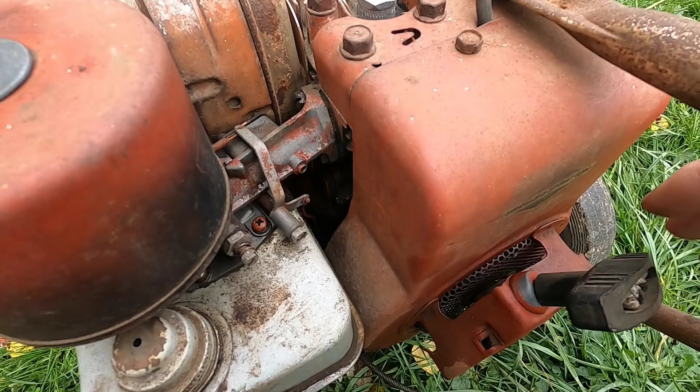This was a purchase I made off Facebook. Normally you see these things for free. Now with the fall season there isn't anyone giving them away. The ad read that it runs like a beast. When I went to pick it up, it wouldn't start. The owner got it started by spraying some carburetor cleaner in here, and she started right up. The blower was working really strong.

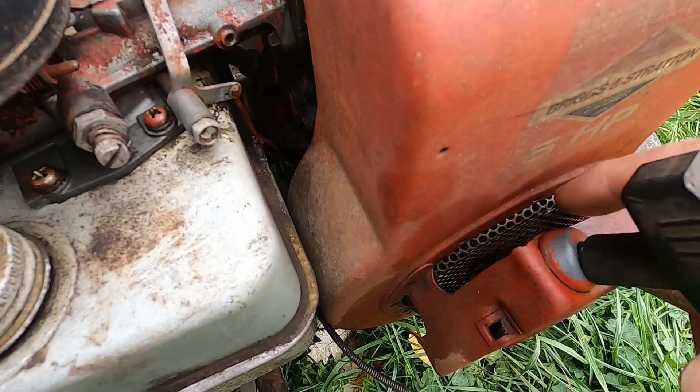There was a lot of force coming out of the blower end of it, but for 2 days I tried starting this, and the best I got was just now what you saw in the video, that it sputtered. First time I did that in days. If you noticed, when it did run, you had a screeching in here. So besides working on this carburetor, I'm going to have to take this cowling off to see what's wrong with the starter. It might be something loose in there. It might be that it threw a couple of bearings.

I'm not sure. So to get started, I'm going to put this up on the trailer to make it easy to work on. And I'm going to be removing this carburetor. And hopefully this tank isn't full of rust. Problem with these old tanks, they rusted up pretty bad. And that could be causing a problem with this no start, hard start situation. So let's get started.

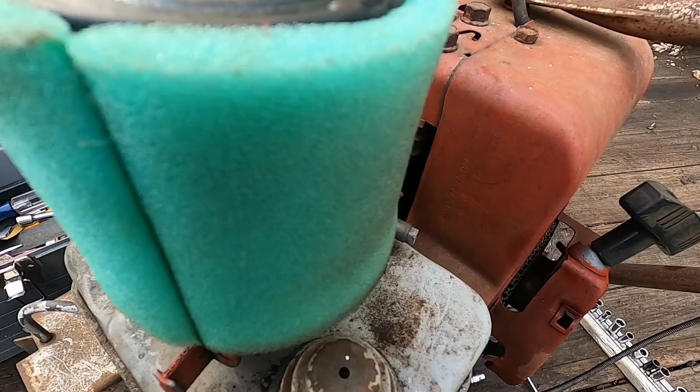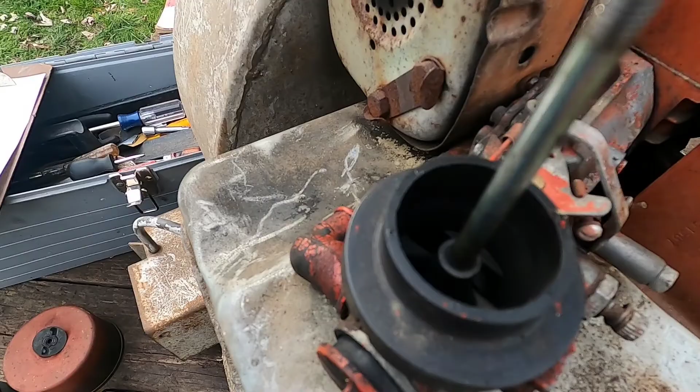All right, looking this over, this is what we have. You have to remove this air cleaner. Got a new air cleaner on it. Looks like a fairly new plug also. Once you have this air cleaner off, you get this carburetor off. I was looking it over. There's a couple of ways we can go. I want to take this tank off because I want to see what the inside of this tank looks like. It's about a half a tank of gas in there.

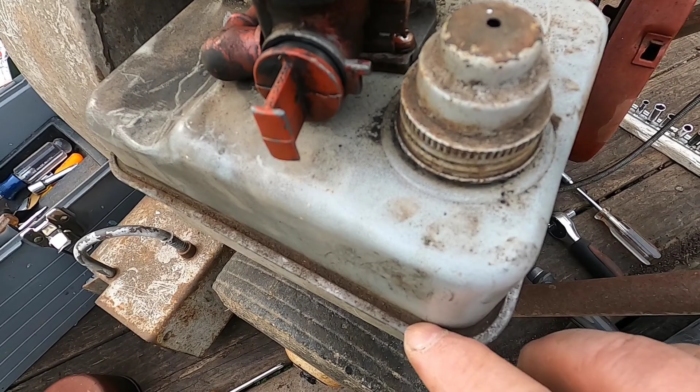And from what I can see, the camera couldn't pick any of that up. I have to get a light in there. You really can't see anything. It looks like it's okay, and it's not pitted on the outside. So I believe this tank will be okay. I don't believe I have to clean out this tank.

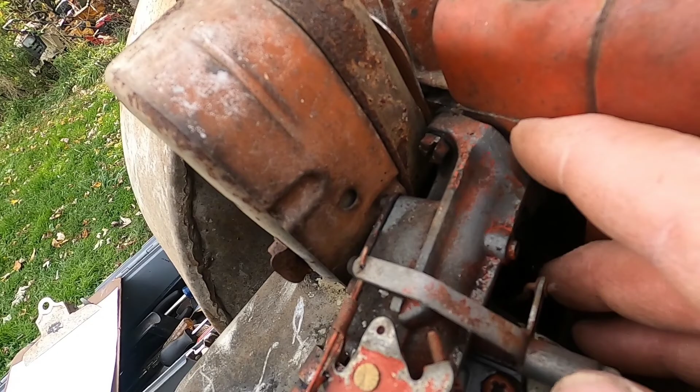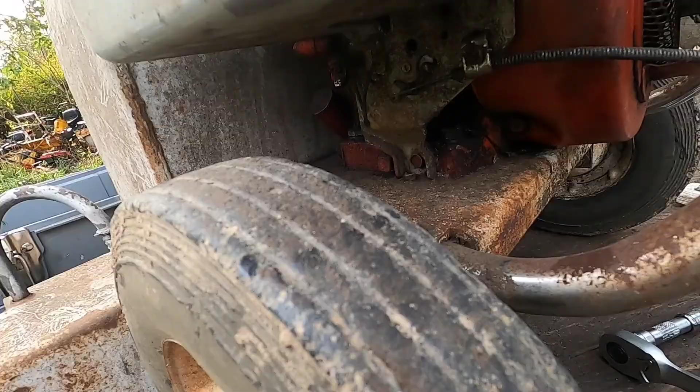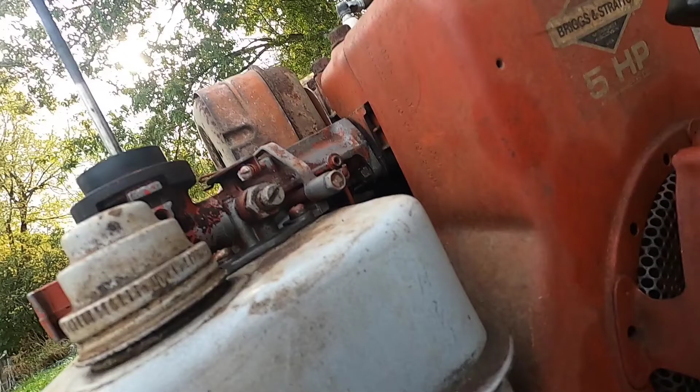First of all, the way this is set up, you have these 2 screws that hold the carburetor intake to the engine. Then you have 1, 2, 3 screws holding the carburetor onto the tank. Now the last one of these I did, I believe it had 4 screws, but it was a little different setup. And to get this tank off, it looks like there's only 1 bolt holding it on. I don't see anything in between here holding it. So what's holding this tank on is the carburetor itself and that 1 bolt.

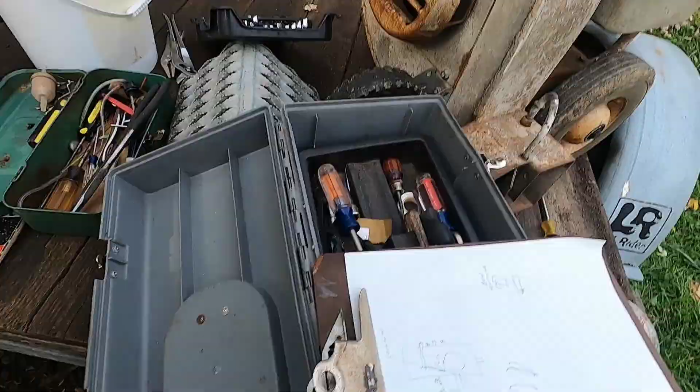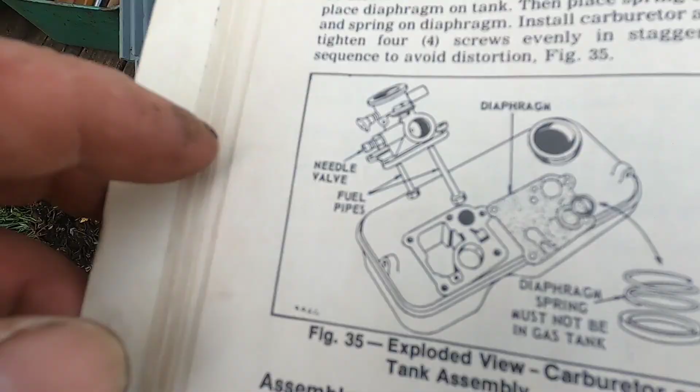So what I'll do, I just might drain this tank, might just siphon it out to see what that gas looks like. And see, the problem with taking the carburetor off like this is there's a long pickup tube on the inside of this carburetor. Let me see here. This is from a Briggs Stratton manual. The pickup tube goes all the way down into the tank, almost to the bottom. My concern is that when I go to wiggle this off, I don't want to snap that tube.

This unit has to be every bit of 20 years old, but I will try taking the carburetor off, leaving the tank on. Now to get this carburetor off, like I said, there's those 3 screws. Plus I'm going to have to remove this screw here. You see this screw, when you move the throttle, it controls the throttle, and I believe the governor down on this end. So I'll have to take this screw out, and let's see, I have to disassemble this piece over here.

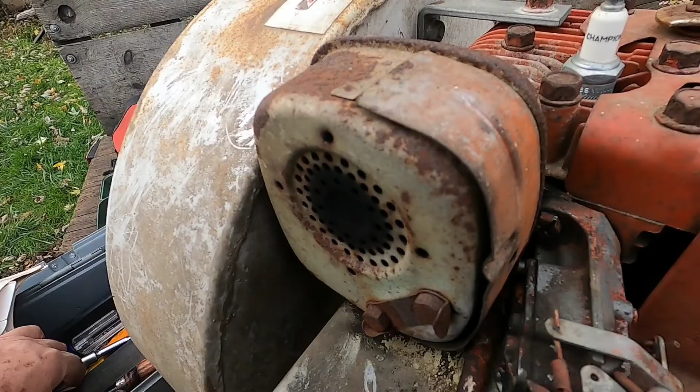I'll be able to remove this tube when I remove that screw. Now here's the kicker. These screws back here, there isn't any way I know of to get these screws out, unless maybe I take this muffler off and I can use a wrench on this. And the only way to get a wrench on here, a thin one, is to remove this muffler. I'm not doing a restoration on here, otherwise I would remove the muffler.

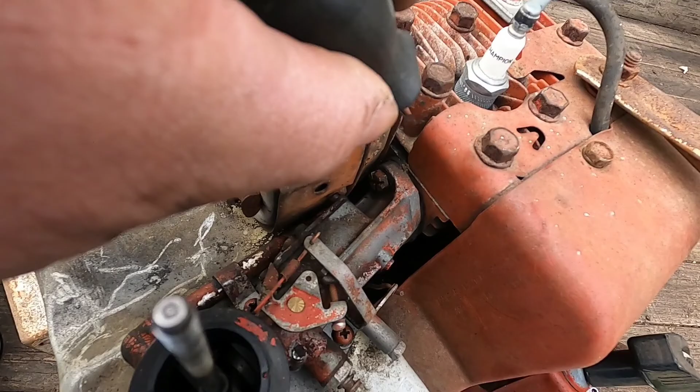But you never know when these bolts are going to stick and maybe even break off into the block, and that's another can of worms I don't want to get into right now. And what I did to loosen them up was to go into the side slots that the screw has, and it turns fairly easy. You can see the angle that I'm at.

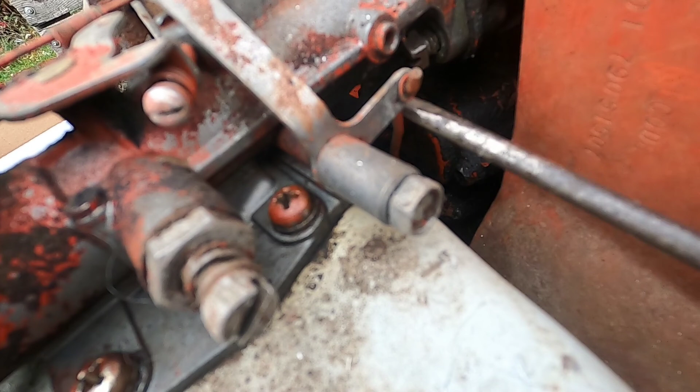Anyway, I'm going to disassemble this carburetor from the engine, from the gas tank, and I'll show you what it looks like and what has to be done. To get these two top screws out, this one I could get a wrench on and turn part way and flip the wrench. This one down here, I found it easier to use a long screwdriver to get into the slots that are on the side of the screw and turning it that way.

Hey, this is taking more time than I wanted it to. I'm thinking it might have been better just leaving it and hitting it with some carburetor spray. And I had to start it. Well, I started it. I gotta finish it. Oh, there we go. I think I got it now.

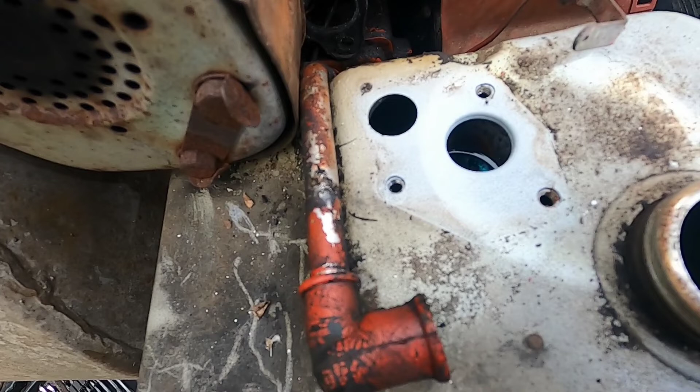Okay. I'm gonna get this screw out, this screw out. Like I mentioned before, I'm going to remove these screws, remove this piece here. You got to be careful not to bend any of the linkages when I get this out. Once I have this off, we'll take a look at this carburetor. I got the carburetor out, and I'm trying to get a view of the inside of this tank, and the camera's just not picking it up.

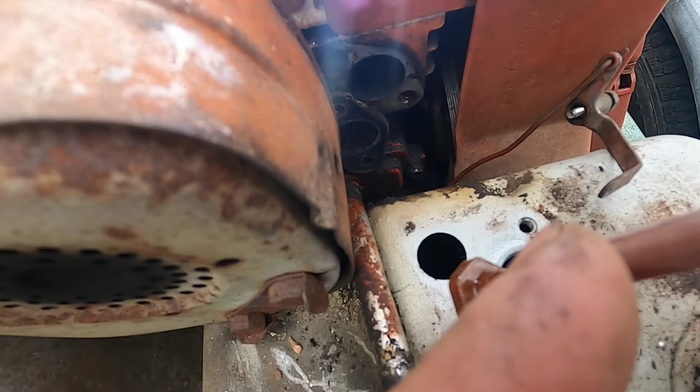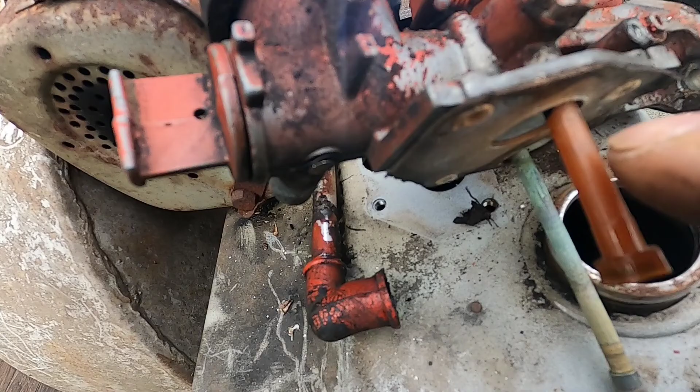For those of you that aren't familiar with this type of setup, this doesn't have a float bowl in it. The way it works, the carburetor pulls fuel up through this tube and it goes into this little well over here, and from this well it gets pulled up through this smaller tube over here, and inside over here there's ports that allow the gas, the overflow gas, to go right back into the tank. So the way this works is that the gas is constantly pumping through.

This over here does look like it has some kind of debris in it. Yep, it's stuck to the bottom. This is what's in that tank. Looks like I'm gonna have to pull this tank off and clean it out anyway. But for now, I'm concentrating on the carburetor. We have these tubes, and you gotta be careful not to snap this tube.

And another thing, sometimes these tubes, they'll have a crack in them. If there's a crack in this tube, it's going to be sucking air in and it's not going to run right. So you got to be careful, and if I'm not mistaken, I don't believe they sell these any longer. It does look like the same size as a brake line though. But anyway, the gasket on this looks okay. Here's where the fuel pump is. I'm going to clean the outside of this off, then I'm going to open this up and see what this pump looks like. I'm going to spray in all these ports.

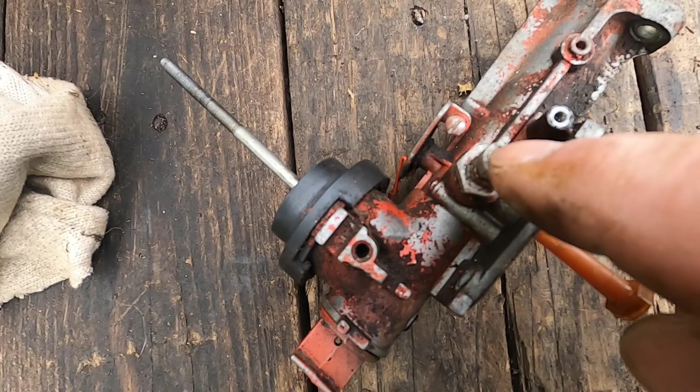I believe this would be the high-speed screw. It's hard to explain and do this while I'm videoing it. But I'm going to turn the screw in, count how many times it was turned in. This way, when I go to put it back, that's where I'm going to start at. I knew it ran with it in this position. Once I have this cleaned up, I'll be back to show you as I'm taking it apart.

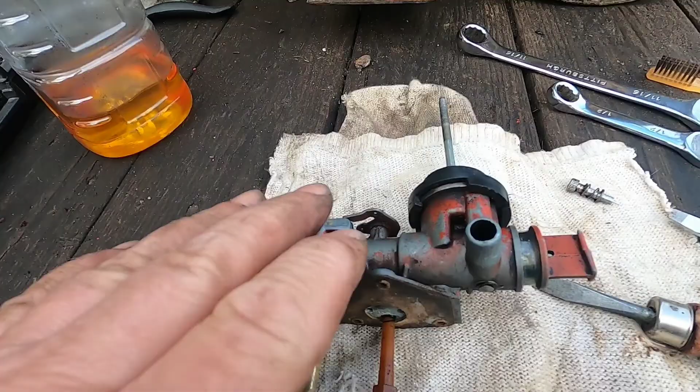I cleaned the outside of the carburetor with a toothbrush and some old gas. This is gas that I pulled out of a tractor, but the complaint was my tractor won't start. Take a look as to why. Anyway, I used this gas to clean the outside of this carburetor.

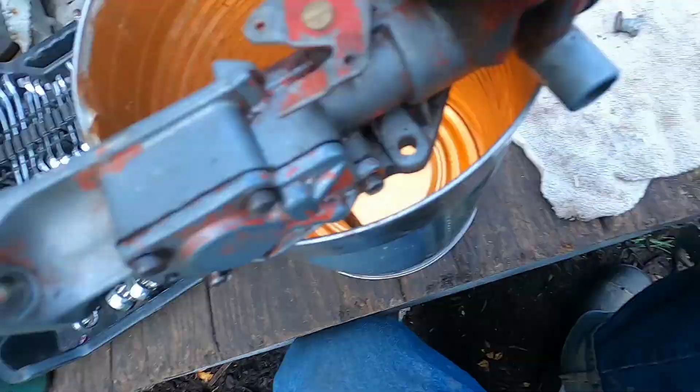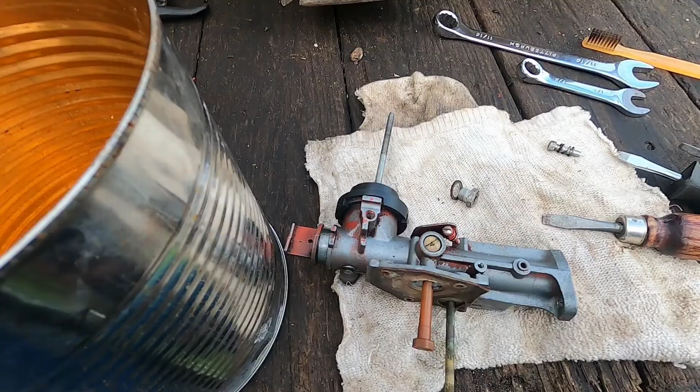I want to point out, on the top of this carburetor, this connects it to the throttle, to the choke, and if the camera's picking it up, there's a tiny spring. Watch, you want to make sure you don't stretch that spring out. Put this in here, we don't want to lose anything. So the first thing I'm going to do is this adjusting screw. I already pulled it out.

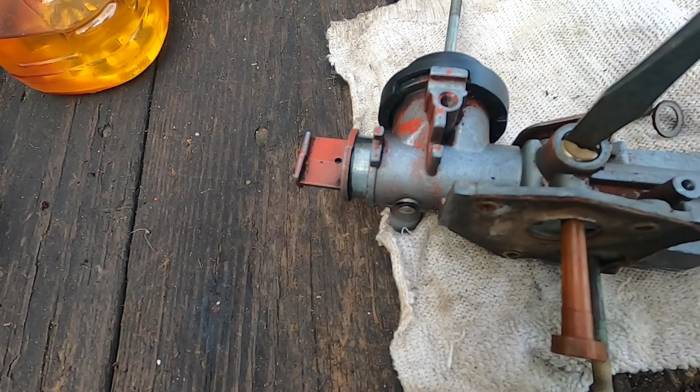So before removing this screw, I counted how many turns it took to reach bottom. It took one turn and then a quarter turn about that high. Then there was this nut that screw goes through, a washer, and I already started taking this out. This is the main jet. When you go to take this out, you want to make sure you get a screwdriver that's wide enough. And this one happened to be a little on the loose side. Sometimes they're in there pretty tight. Okay, here we go.

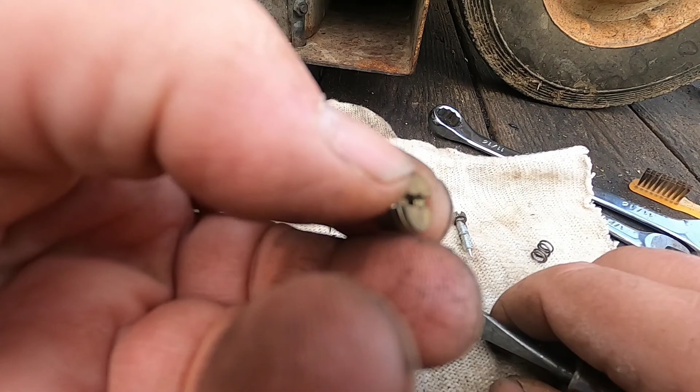See if we can see through here. Well, now this is clear. I don't know if the camera's picking up. I can see right through. There isn't any blockage in here at all. And this tip was in good shape also. There wasn't any debris on this tip.

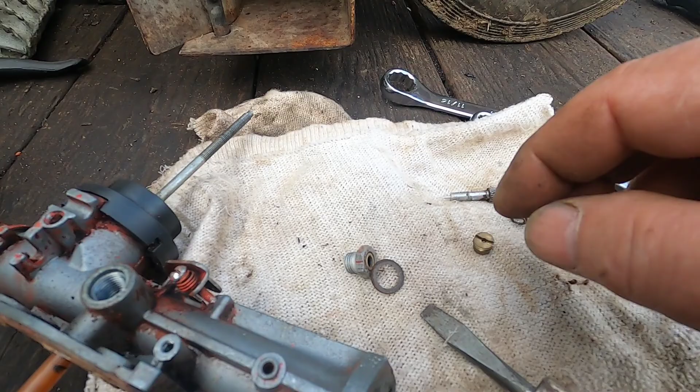Now I'm going to go to the other side where the pump is. And let's put these in here. The way this ran, when he got it started, it was running strong. So I don't expect to find too much into the carburetor. But I'm going to be using this leaf blower, and I'd rather do what I have to now, so once I start using it, I don't have to play around with it. Under here will be similar to if you ever taken the chainsaw apart, the way that pump works.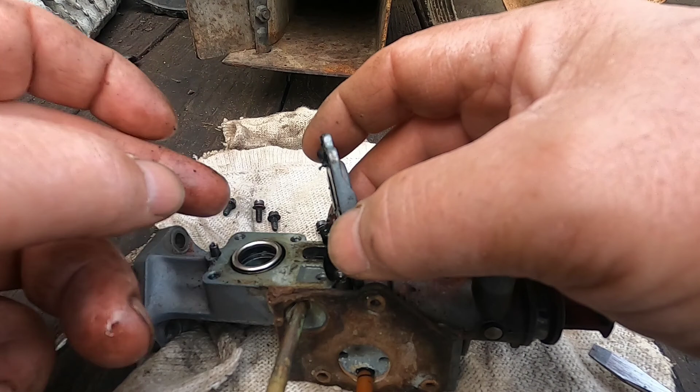All right. There we go. Okay, we got a little gasket here. We don't want to rip anything. And we're not looking good here. Just want to point out you have this collar and you have the spring. When you put this collar in, the concave side goes down to hold the spring. It goes in like that.

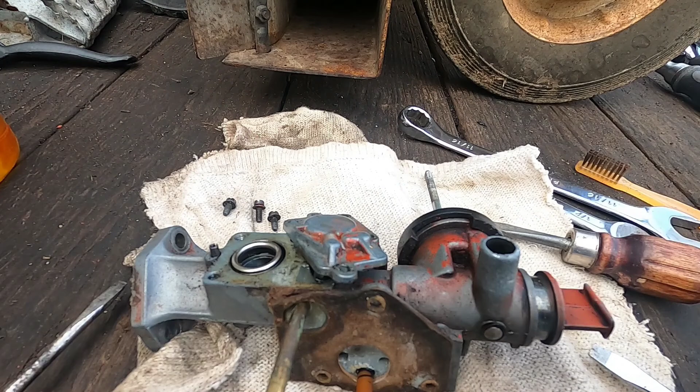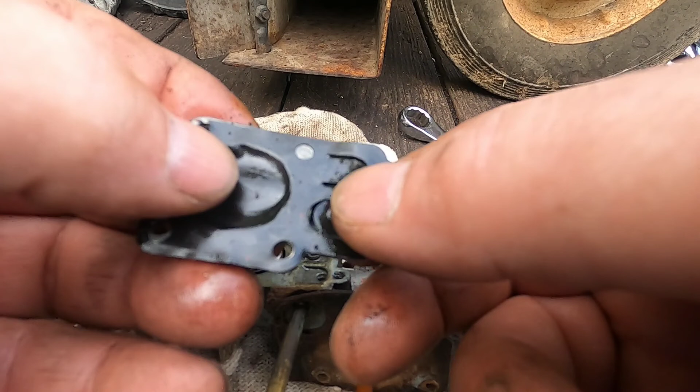And I don't know if I should mess with this or just leave it alone. I might regret this. Oh, there we go. Okay, and this is your pump. Now if you had to change anything on this, sometimes the springs go, but it would be this piece right here. And I might have a problem here. I do have a problem. I hate to put this back together and it not work.

These get stiff sometimes, especially with the ethanol gas, but this is pliable. Other than me ripping it, this is in good shape. I'm going to look to see if I have another one of these. So the next thing for me to do is clean out all the ports with carburetor cleaner. I'm not going to show it on camera. I don't want to splash onto the lens. And then I'm going to reassemble this. And then the next thing I'll be going for is this tank.

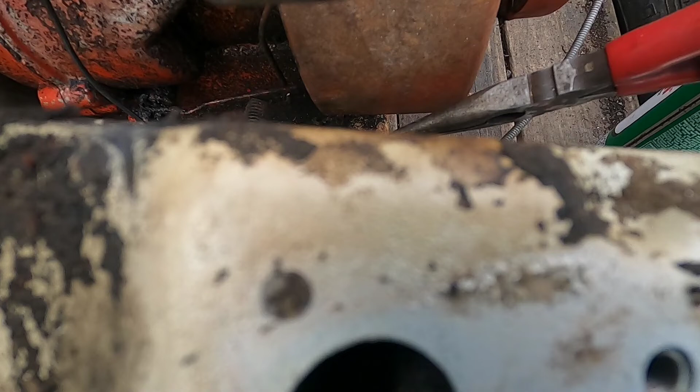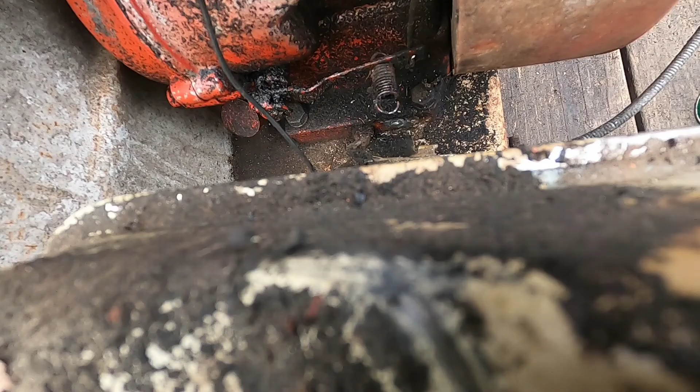There's one bolt I showed earlier that's holding this tank onto the engine. This bolt here. Now the bracket for this tank also has the throttle cable coming to it, and we have this spring connected down below. Okay, should be able to pull this away. Oh, and it has the kill switch on also. So for now, I'm going to put this camera down, empty this tank. We'll see what this gas looks like, and I'll see if I get a better view on the inside of this tank.

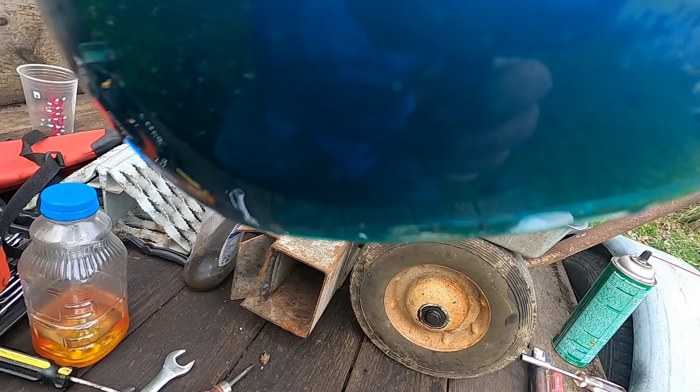This tank doesn't look bad on the inside. I don't think the camera's picking this up, but it doesn't look bad at all. A little bit of debris that was up in here, I'll be able to get that out. Now the fella that sold it to me is a second owner, and he said he takes care of his equipment, and from what I've seen of this carburetor, the inside of it looked fairly clean. And you can see this gas here, this is some kind of stabilizer he has in here. I don't see any debris in this gallon jug.

Hey, a good reason to drink wine. You get these gallon jugs that you can check your gas with.

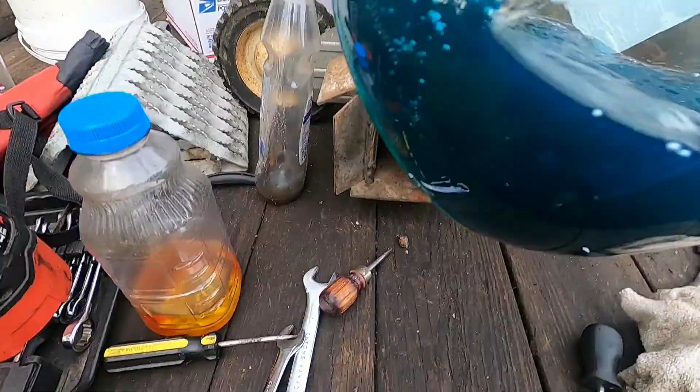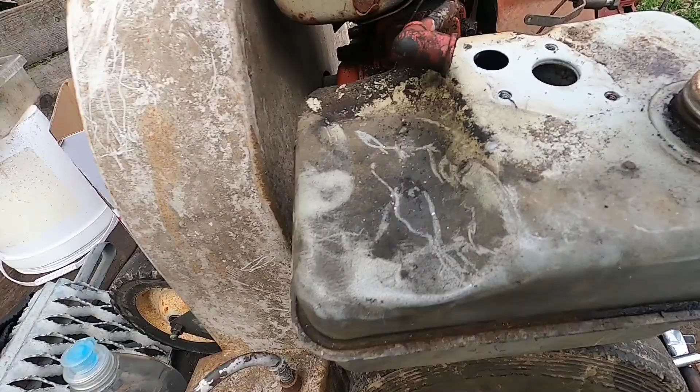Let's see here. I don't see anything in there. I don't see anything floating around. So I don't know how that little bit got up in there. Who knows? For all this debris on the outside of the tank and everything, that little bit that's in there isn't bad at all. I'm going to rinse this out, get that out, spray this down, clean the outside over here. Hopefully I won't be looking at this part again. And I'm going to be taking the shroud off because we have to take care of that screeching noise to see what that's all about.

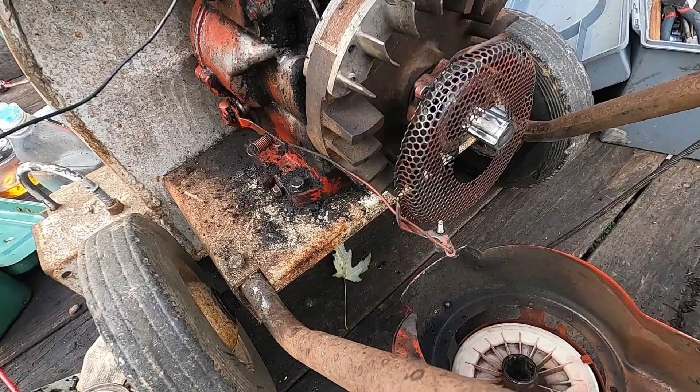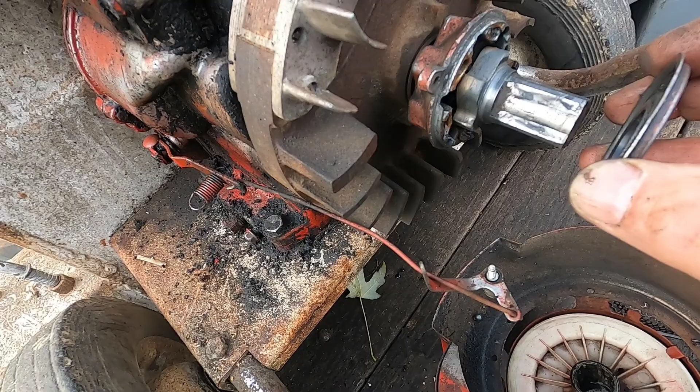Well, now I know why we had all that screeching. Here's one of the bearings. It goes into that piece there. This piece should be screwed on. Should be two little screws that hold this piece on. And here's where the problem is. There's the rest of them. Okay. I'm gonna have to put this camera down and let's see what we can find here.

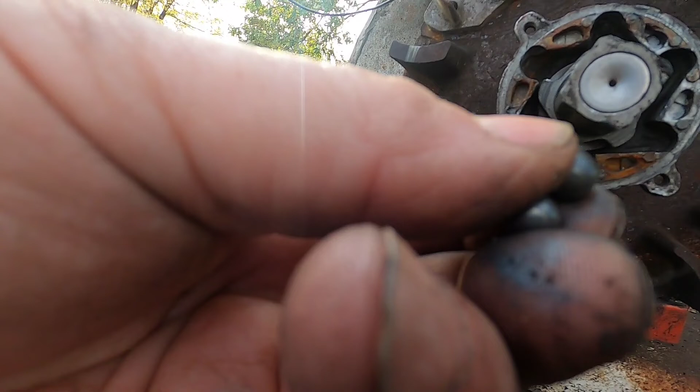It's been a while since I had to play with one of these, but this is the way the starter works. You have these little bearings, and when you pull the cord, those bearings will jam up into these slots. They'll rest in here, and when you pull the starter cord, it pulls it. That's what turns your engine over. Now, this thing came apart. To get this off, you would hit it the opposite direction, and this whole piece will spin off.

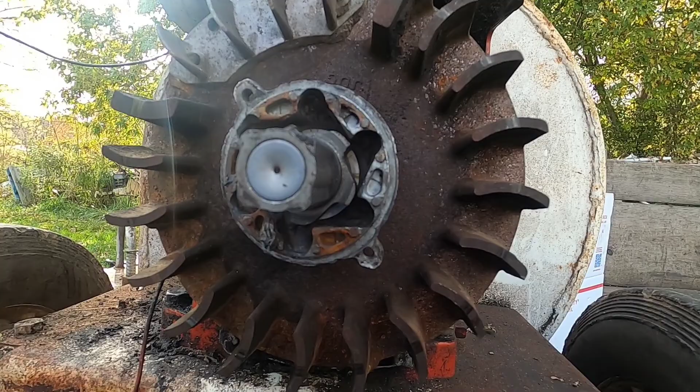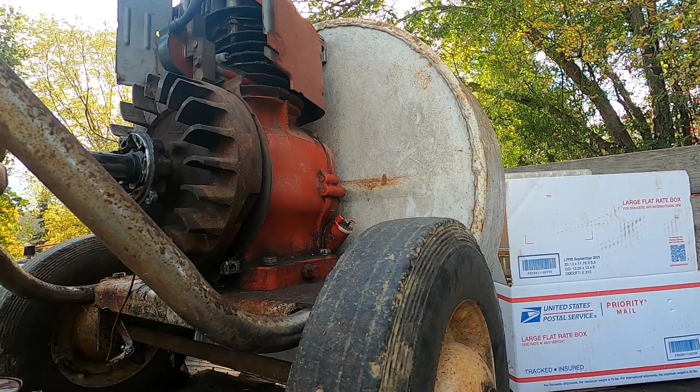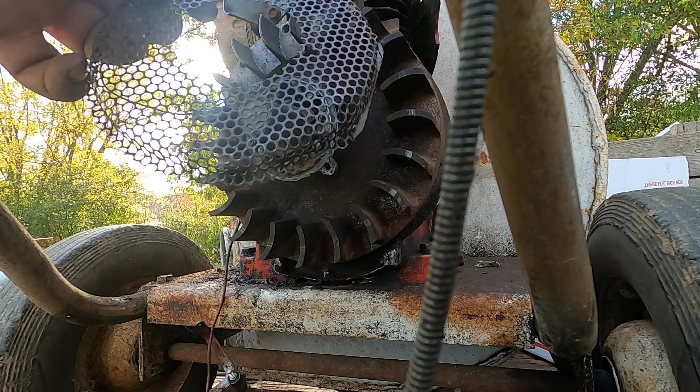My question is, why did it come apart? Let's see. What we have to do is get these bearings in, well, before I lose them. Wait. Well, at least we have them all. None of them are missing. Not yet, anyway. Oh, no, wait. I am missing one. No, there we go. Put this back together and see if I can find a couple of screws to attach this.

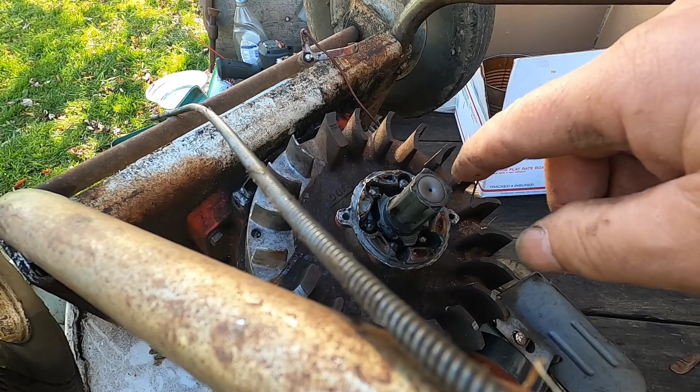We'll see. I flipped this blower on its face to make this easier to work on. Looking at the starter mechanism, I can see that some of these slots are pretty worn, and I'm assuming what happened was, being that it's worn, one of these balls might have popped out and pushed this cover out. I'm not sure if that's what happened or not, but anyway, they're in there. They're greased up a little bit. I have grease on the shaft that this went on. This goes back down. Got to tap that on, and now this has to go on, but the screws for this were missing. The screw has to go here and the screw has to go there.

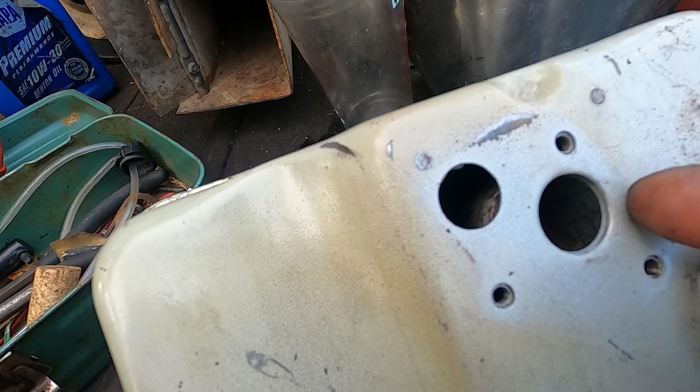All right, before I put this all together, I just want to point out a few things. I don't know if what I did is going to help it start any better or not. The carburetor looked like it was clean all the way through. I didn't find any blockage, but in this section of the gas tank right here, this part that replaces the float valve, that doesn't come off. You can see that on the bottom. It's embedded in there. I'm trying to show it. There we go. But what I did find, remember earlier I mentioned that there's ports when the gas flows up and out. It's constantly flowing through and there's little ports going through. Could you see my finger over here?

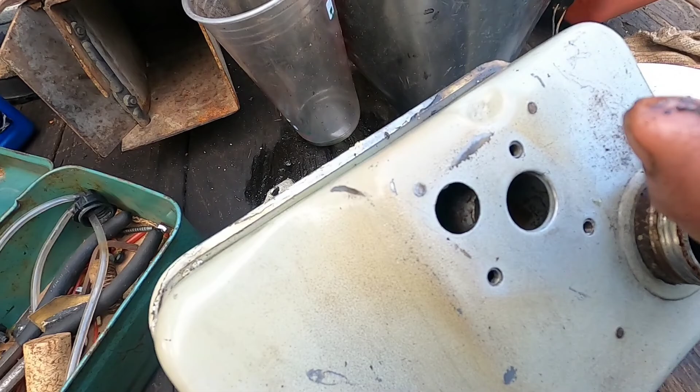Maybe not. Right in here, there's an opening where the overflow of gas fills this up and goes back in. Well, when I get my finger in there, that's where the rust is. The tank itself, I poured gas in a couple of times and flushed it out. I didn't get anything out of that, but right up here is where the problem is. And this is where any blockage that we're going to have is going to come from. I'm going to clean this out the best I could.

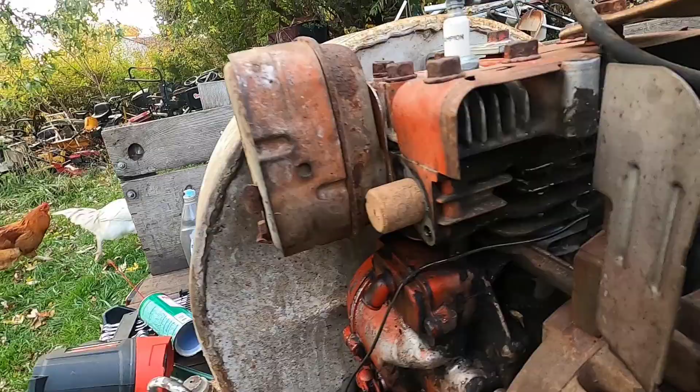Another thing, when I got this back on, the camera went out on me before. I'm not sure if I showed it or not. This gets tapped on. I tapped this on with a hammer all the way around, and this needed 2 screws. And the 2 screws I used were actually from the zone valves that I replaced in another video. That's up above if you want to see that one. So sometimes it pays to be a little hoarder. Whenever I come across some screws, large, small, doesn't matter the size, but something that I don't run across often, I save them. Never know when you're going to use them. And this just happened to be just last week, so that worked out well.

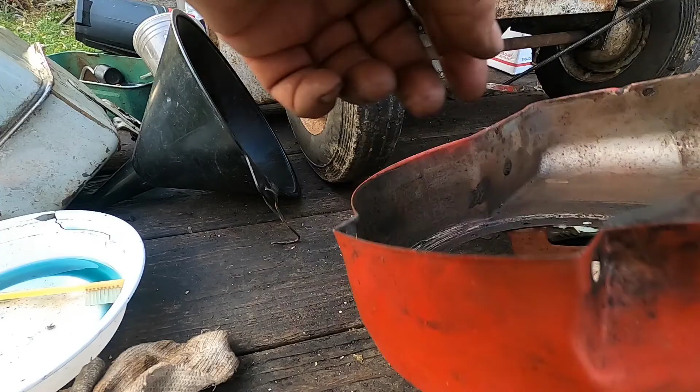The benefit of everything I did so far was getting this together, because that wouldn't have lasted much longer. The mechanism on the inside, it would only be a short period of time before that was just completely stripped out and it wouldn't work. I have to see if I find one of the old lawnmowers that have this on here and pull it out, because at some point I'm pretty sure I'm going to have to change this. But by spraying a little carburetor cleaner in here, it freed up the wheel, and I put a little bit of oil in there to lubricate it. You can see now this cord pulls all the way in, and it pulls back all the way.

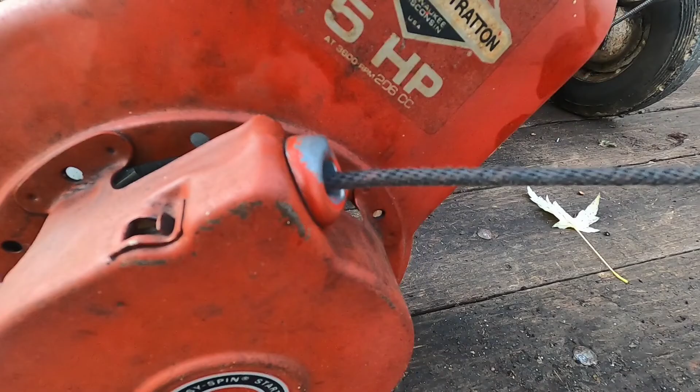Whether it's a lawnmower, leaf blower, anything that has a recoil like this, every so often it wouldn't hurt to pull this off and put a little bit of oil in there, clean it up. You have that big spring that goes around in here, and all this stuff, it'll cake up in there and it'll keep it from pulling back.

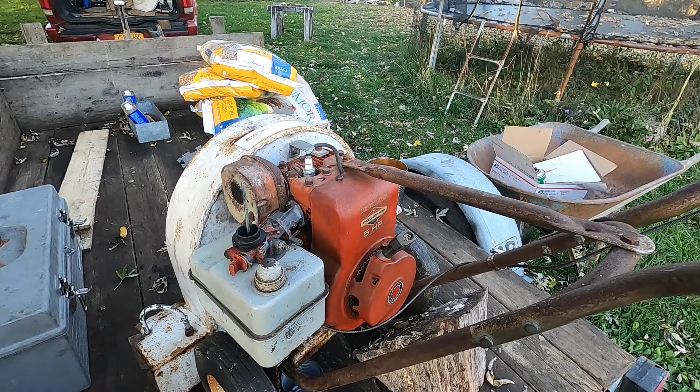All right, I have the starter put back together and mounted back on. I have the gas tank and the carburetor mounted back on. I checked the service manual, and it says when you're removing this tank, to remove the tank and the carburetor all in one piece. That didn't look too feasible at the time, but when I put it back together, I put it back that way with the carburetor on the tank.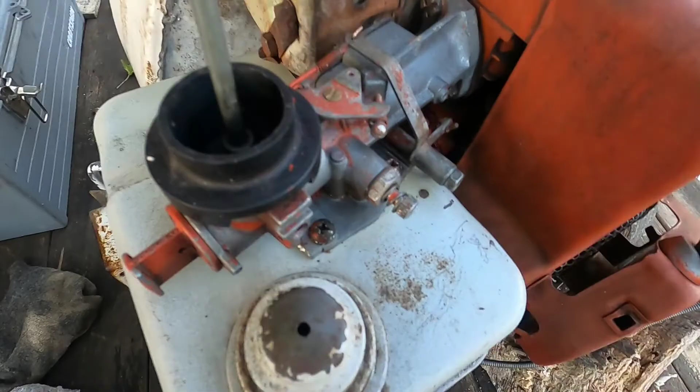I didn't have it mounted, but what I did have, I had this piece connected. Then I screwed this back in. I connected the throttle linkage. Then I tightened this bolt. The carburetor was loose on the tank, and this one bolt that's on the bottom here, holding the tank mounting plate, I left that off until I got these screws. When you put these screws in, don't forget the gasket that goes back.

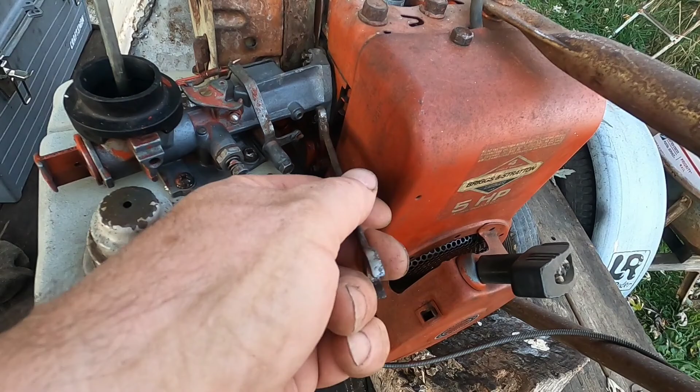And this was painstaking. This was the hardest part, getting this screw in and this one back in. The way I went about it, this top one I was able to turn until it got tight. Once it got tight, I used those slots on the side to finish tightening it up. I couldn't get a wrench on here. This bottom one was a combination of using a screwdriver in the slot, and when I got to where it was tight, I was able to get this wrench on it and snug it down.

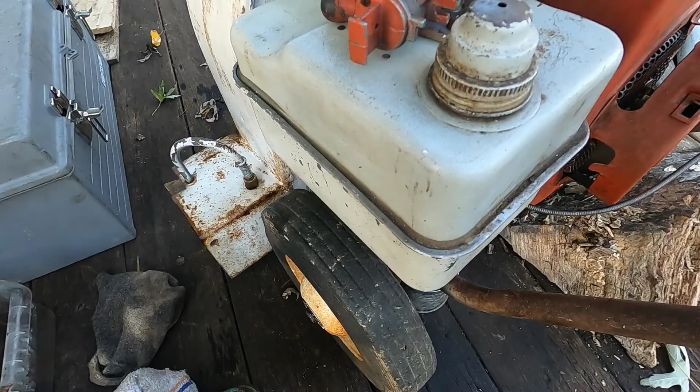Now, using the wrench or the screwdriver on this bottom one, the most I was able to turn it at any given time was 1/8 of a turn. Now, while I had this tank off, I drained the oil. This is what it looks like. Talk about dinosaur juice. When I drained the oil, I used this plug over here because of the way the trailer was tilted and the oil dripped to one side, getting into the container.

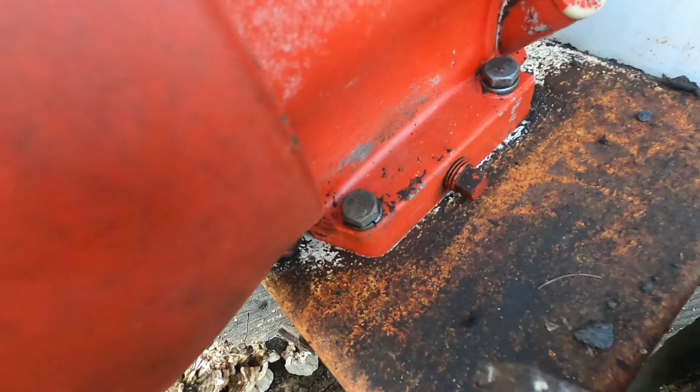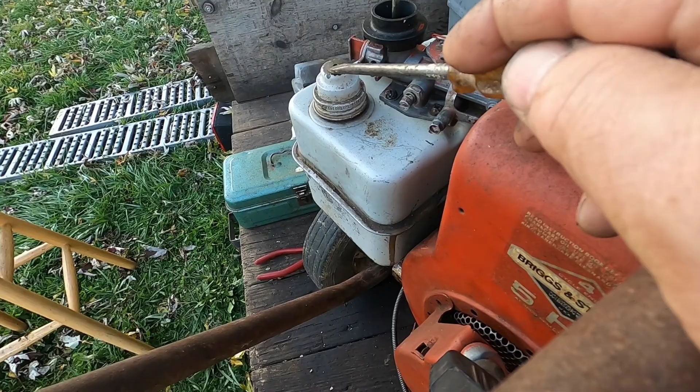On this other side, you do have another plug over here where you could drain the oil. Or if you have one of those vacuum pumps, you could just stick the nozzle in it there, pump it a few times, and you could drain it out that way. So now all that's left to do is to get some fresh oil in here, get that air filter back on, get some fresh gas in here, and see whether this was worth the effort.

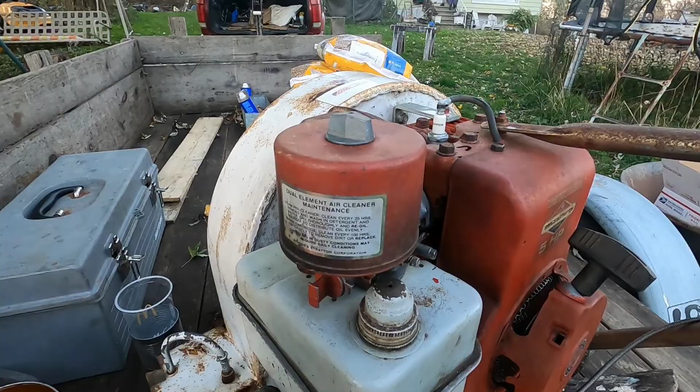I have it gassed up, I have it oiled. The manual recommends to use 10W30 weight in the summertime and 5W30 in the winter. Normally on these machines, I always put a straight 30 weight in it, but I just happen to have this 5W30 from NAPA. Been sitting on this for quite some time.

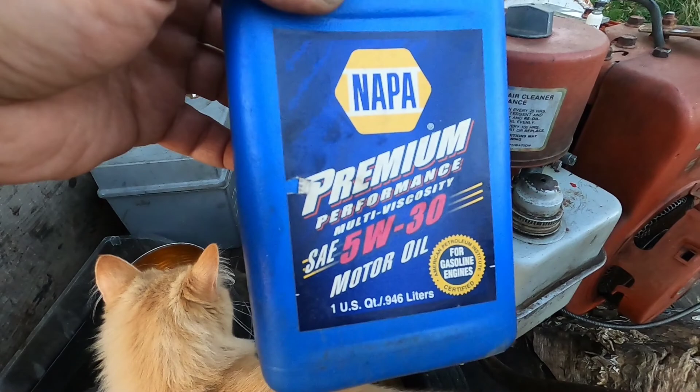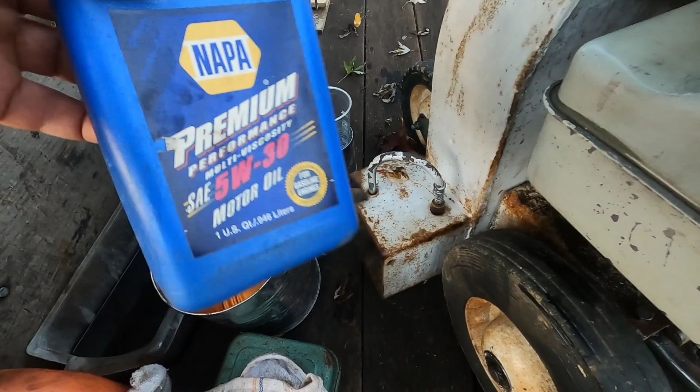A while back, NAPA had a crazy sale on the oil. I forgot what I paid, but it was really low. And I picked up a case of 5W30 instead of the 5W20 that I needed, and I just didn't bring it back. And I've been sitting on it all this time, waiting for this machine. So let's get this off the trailer and see if it's going to start. Okay, here we go.